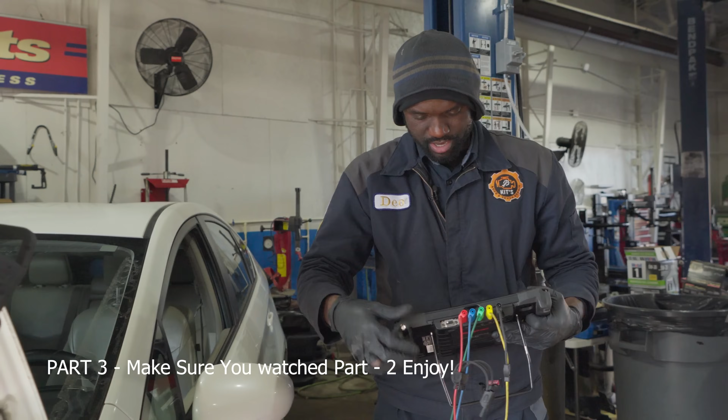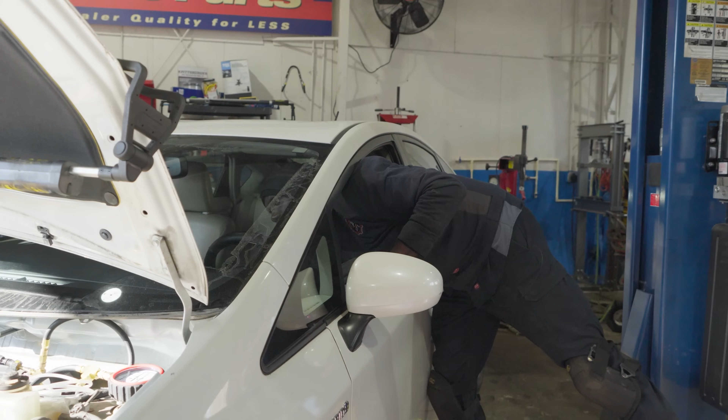So we have replaced the O2 sensor. Now I'm going to, let me turn the key on first. We're gonna start the engine. Okay, so key is on.

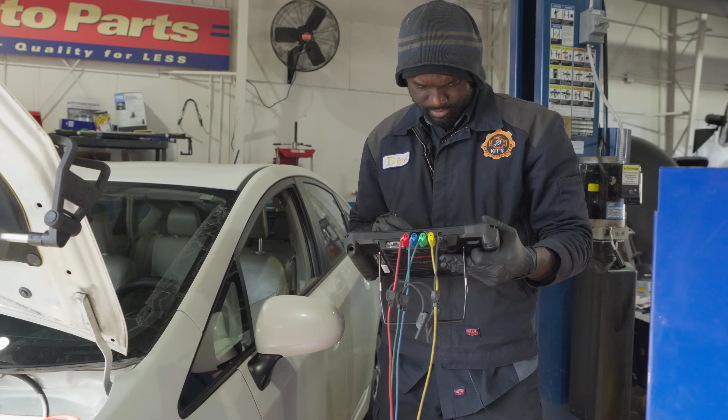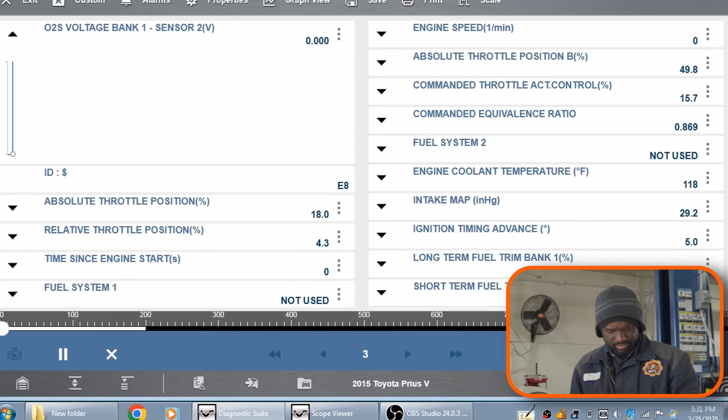Okay, so we have our voltages on the lab scope. One thing I noticed is the voltage on the yellow trace went down to 0.28 volt. I don't know if that makes a difference, but let's see. So I'm gonna graph the second O2 sensor. It's still stuck at 0 right now.

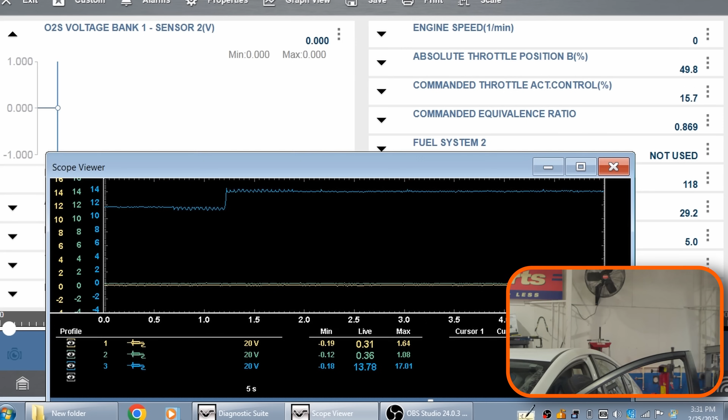Let's bring up our scope. Okay, so now let's start the engine. We might have to take this car for a test drive.

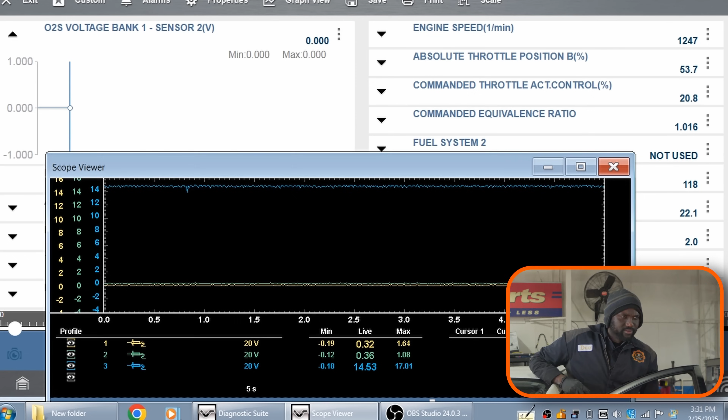We still have 0 on the scan tool. It's odd. Did we make a bad call? Maybe it didn't need a sensor. Okay. I'm not gonna say that yet. Let's go. Okay.

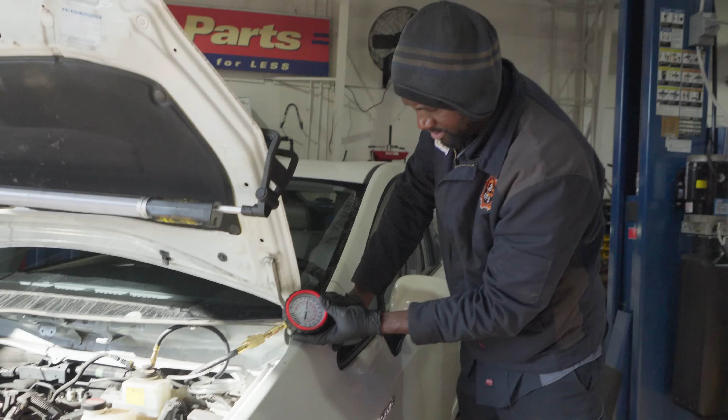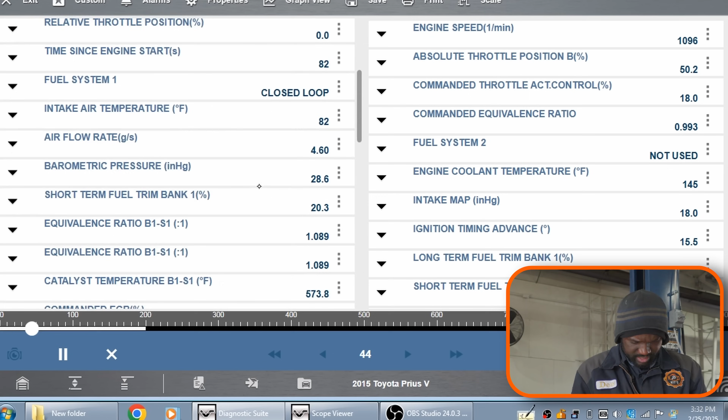So the engine is running and our fuel pressure gauge is at 45 psi. Let's look at our fuel trim numbers. Okay, so long term right now is at... so our fuel trim numbers are still high.

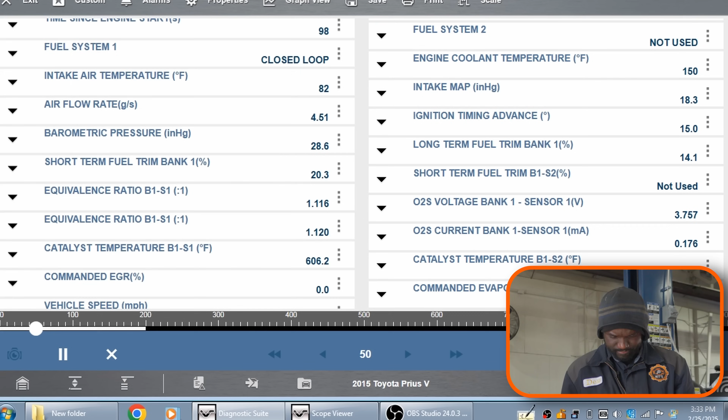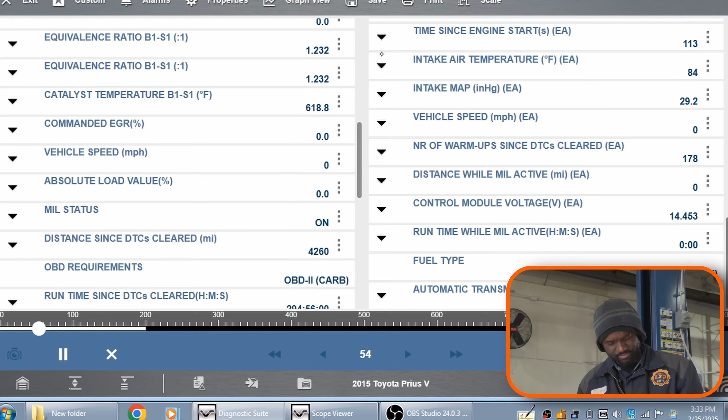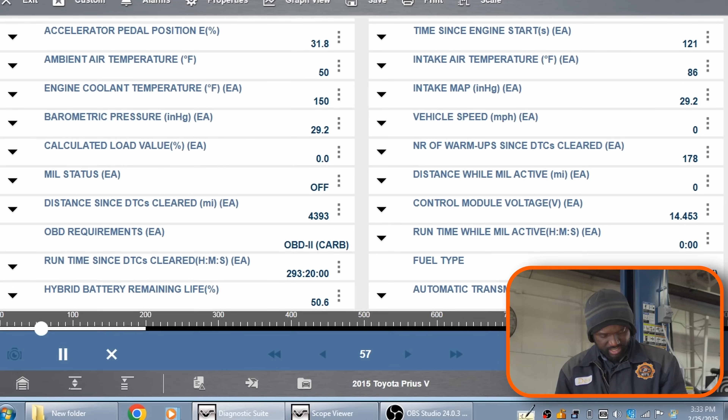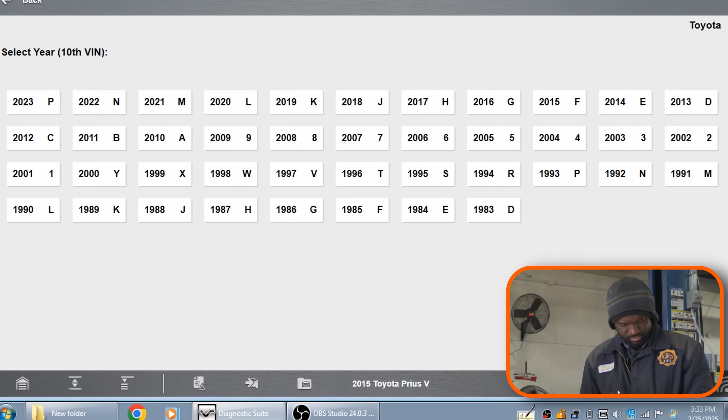Okay. Okay, the O2 sensor is still stuck at 0. Very odd. Now, do we have clogged injectors? Maybe. We might have to take this for a test drive. Actually, let's go back on the OE side of the scan tool. Actually. Interesting.

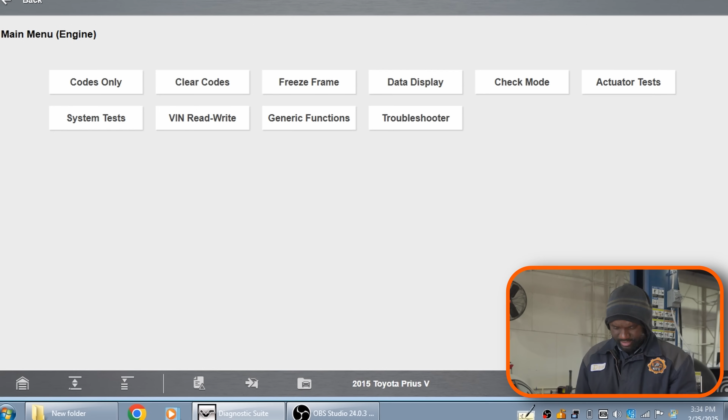Very odd. So there's one more test I want to do. Let's go to functional test. Let's see if we can turn on these injectors. Okay, fuel cutoff 1, 2, 3, 4. I think we can turn on the injectors.

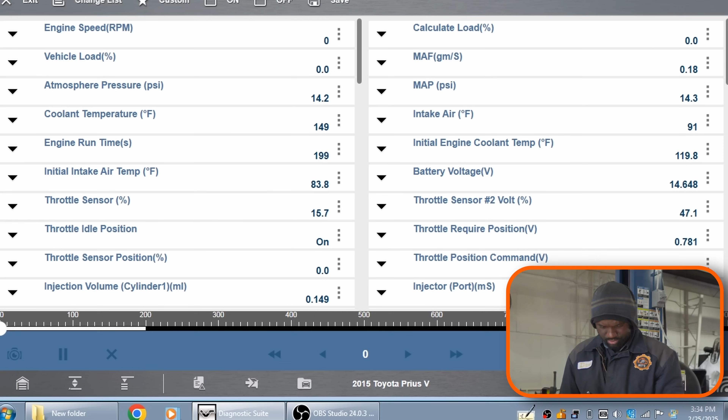Let's see. So I'm going to have my pressure gauge here. Pressure gauge is at 40 psi. I don't know if you guys can see this. We're gonna turn on the injector. Let me back out. Let me start the engine.

Okay, so I'm gonna try to do this fuel cut test. So I believe it's gonna turn off the injector, and then we're gonna look at our gauge here to see if the gauge is going to either drop or rise. And then we're also going to listen to the engine RPM to see if the engine RPM is going to change when we do that.

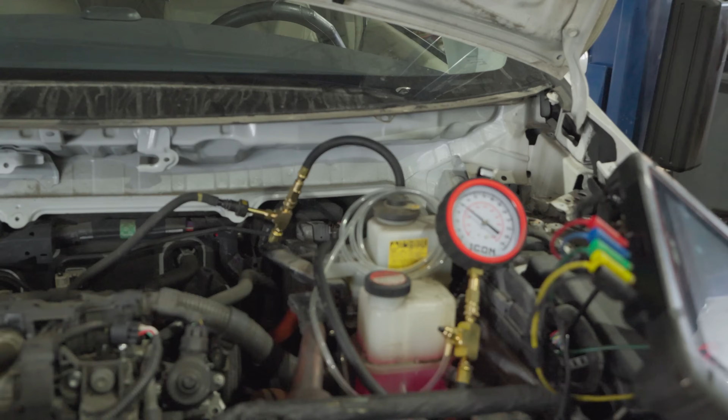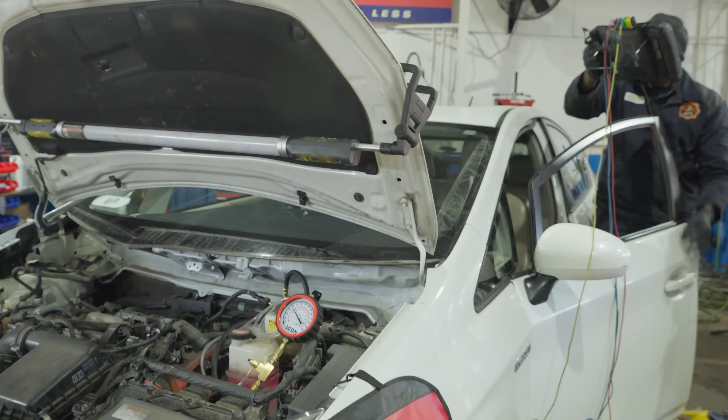Because at this point, guys, I don't see what else can cause this, because I mean, we have good fuel pressure. Our mass airflow sensor is good. Let me start the engine. Let's see if doing the fuel cutoff thing is going to make a difference.

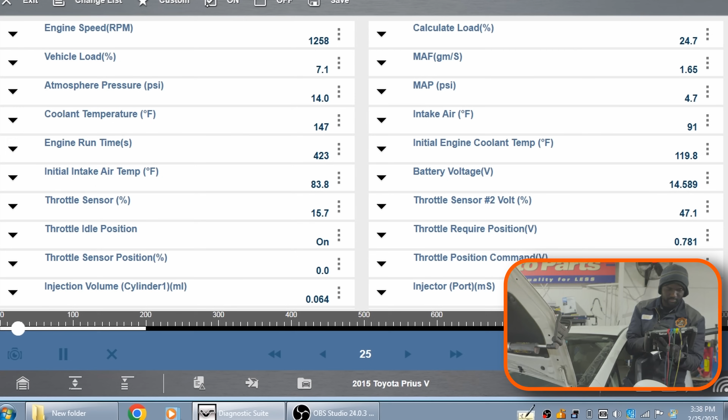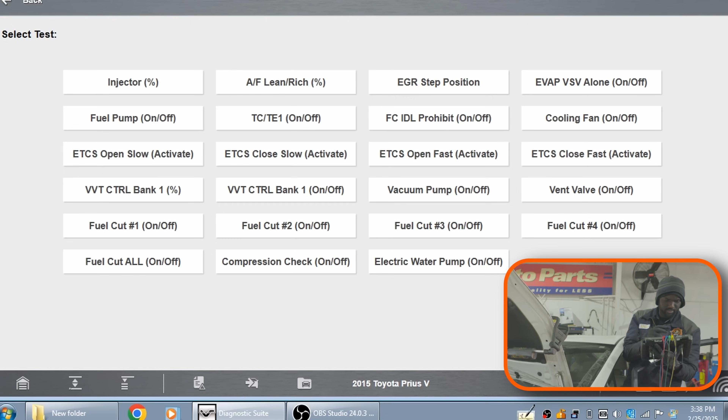Okay. I can keep this thing running. All right, so what test can I do now? Okay, so my Snap-on scan tool is about to die. I'm gonna switch scan tools. I'm going to get my Autel scan tool connected to the vehicle.

The test I want to do now is I would like to use my Autel scan tool to see if it's going to be able to turn on the injectors while the engine is off. Because what I want to do is watch our fuel pressure on the gauge, and then turn on the injectors. As we turn on the injectors, our pressure in the rail should drop.

So if we have a leaking injector or a partially clogged injector, when we turn it on, the pressure in the rail is going to drop differently compared to the others. So the pressure drop won't be pronounced. It's not going to be low enough. That will indicate a partially clogged injector.

Because at this point, right now we changed the sensor. Our sensor is still stuck at 0. So I want to take this on a test drive, but I also want to check the injectors. The other thing that can cause this could be partially clogged injectors.

So I'm going to get these test leads out of the way. I'm going to reroute the sensor wiring properly. I'm not going to show that on camera. I'm going to get my Autel scan tool connected to the vehicle. We might have to take this on a test drive to see what happens. So I'll get that connected and then I'll bring you guys back up. I have the Autel scan tool connected to the vehicle.

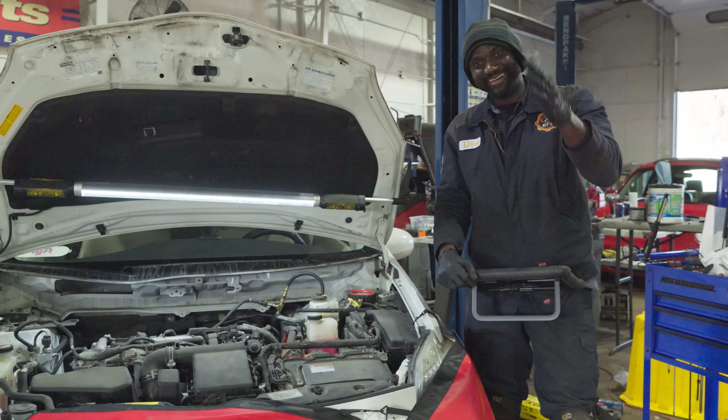So I was actually talking to cameraman Kyler off camera. I was like, so if I was wrong about that sensor, then who's gonna pay for the sensor? Okay, now we're gonna go on a test drive. If I was wrong about the sensor, we're not gonna charge the customer. That's gonna be my bad. It's gonna be my fault. I'll have to eat that. We're not gonna charge the customer for that. We have to get to the point of this.

Right now, I'm starting to lean towards partially clogged injectors, but we're not just gonna throw injectors at this. We have to do as many tests as we can to be 100% sure that's the issue. Okay, so let's scan this first and see what we got. I kind of want to test drive this while I have my pressure gauge connected to the fuel system.

I mean, if our fuel trim numbers were just getting worse at high RPMs, I was gonna lean towards a bad fuel pump. But right now, our fuel pressure on the gauge is good, even while we're sitting here at idle, and our fuel trim numbers are bad also at idle. So that O2 sensor kind of threw me for a loop there.

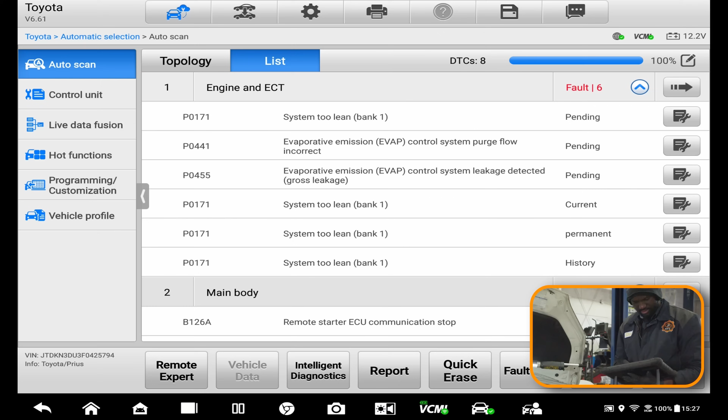Okay, so let's go into the engine computer. Let's go to data. Actually, before we do that, let's go to active tests first.

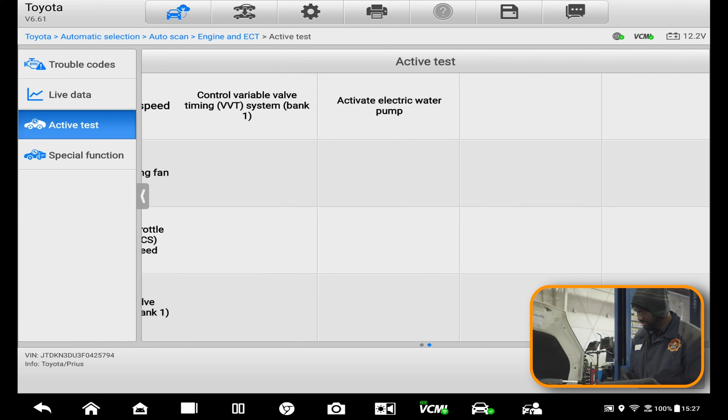So we cannot turn on these injectors. Let's go to special functions. So O2 sensor / oxygen sensor operation. Interesting. What do we have there? Faster detection of the part failure. Inline cylinder. Oh, so this just gives us O2 sensor data PIDs.

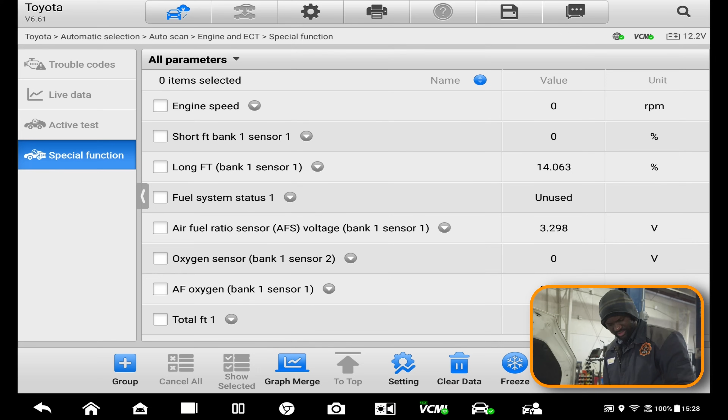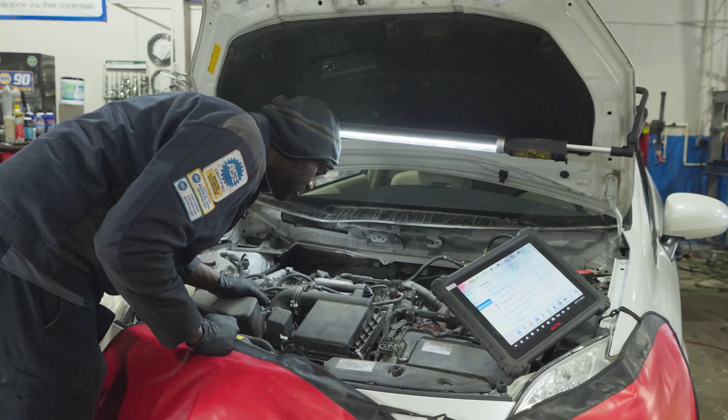Okay, so I have my O2 sensor PIDs. I got fuel trim numbers, O2 sensors. So let's go on a test drive. Okay, I can't turn these injectors on. Okay, let's go. Let's drive this around. We're gonna have our scan tool up.

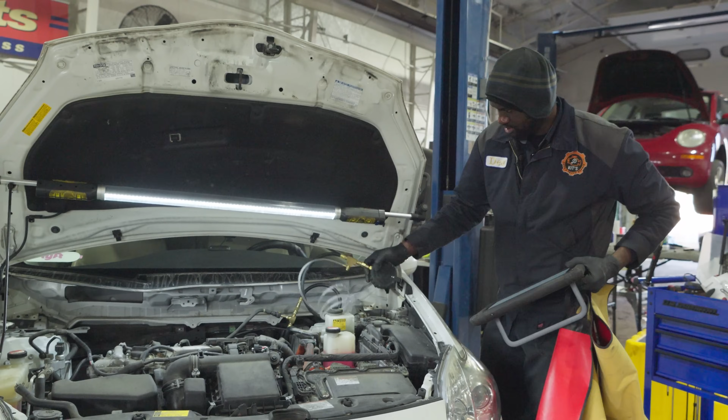I'm gonna try, let me see if I can keep this pressure gauge over here. Let's see, can I have this here? Now, this is a little dangerous, we gotta be careful. We don't want fuel leaking out while we're driving.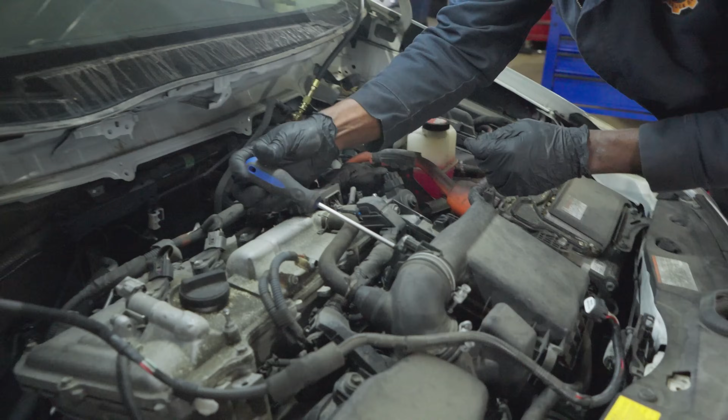There's one more thing I wanna do. Before we go on a test drive, I would like to clean our mass airflow sensor. So I'm gonna get our mass airflow sensor disconnected, and then we're gonna clean it. I mean, I don't think the mass airflow sensor is the issue here, but it's not gonna hurt to clean it.

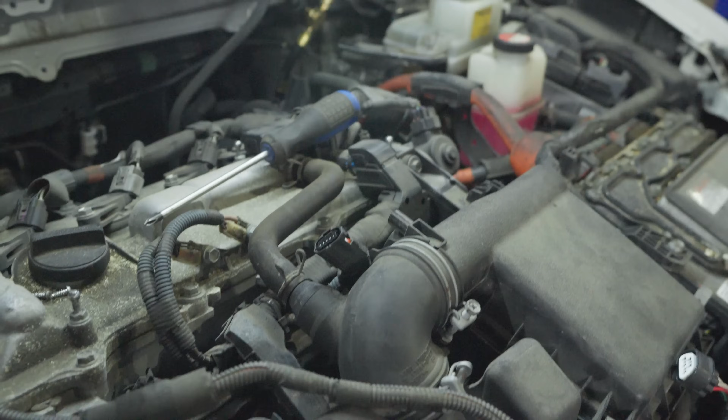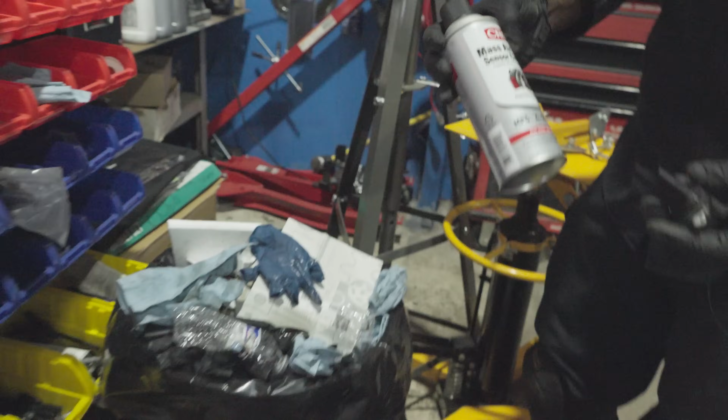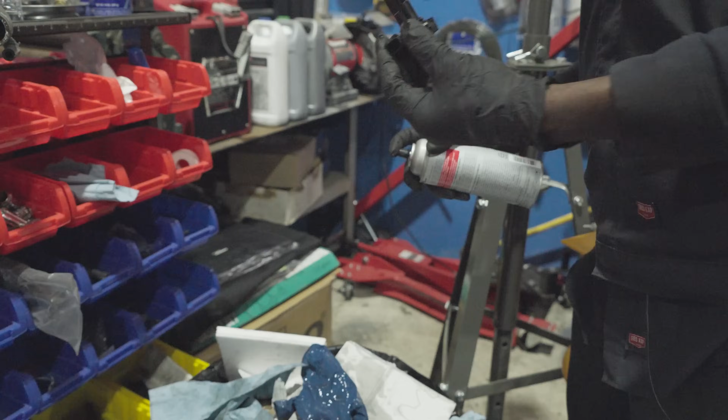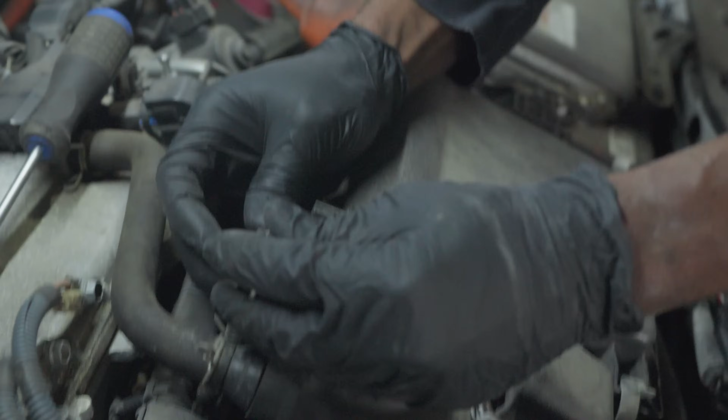Okay. Let me grab a light. So let's see over here. So the resistors on the mass airflow sensor look clean. We're gonna use mass airflow sensor cleaner. So we got the mass airflow sensor cleaned. I'm gonna dry it and then we will install it. All right, so we got the mass airflow sensor dried up. So now I'm gonna reconnect it and then we're gonna reinstall it right there.

Okay, I'm gonna check the air filter while we're here. No, air filter is fine. It's a little dirty, but nothing too bad. Nothing too crazy. Air filter is fine. Okay, this is the wire for the wiper motor. We're just gonna keep this right here while we're test driving. Okay. Cool. So now we cleaned the mass airflow sensor. Let's take this for a spin. All right.

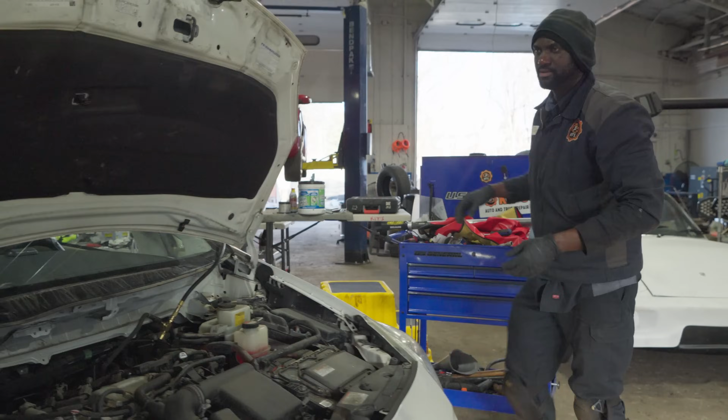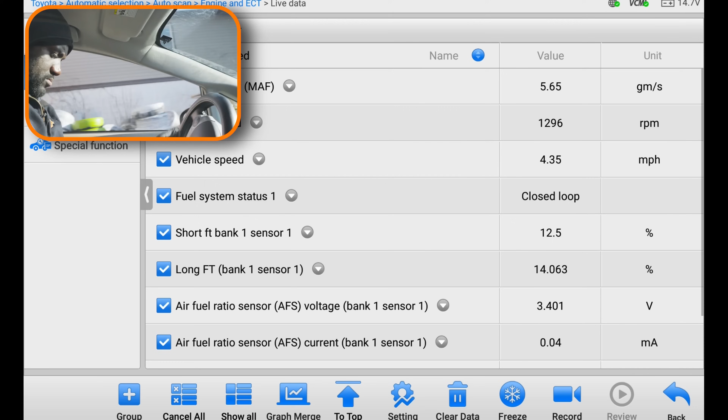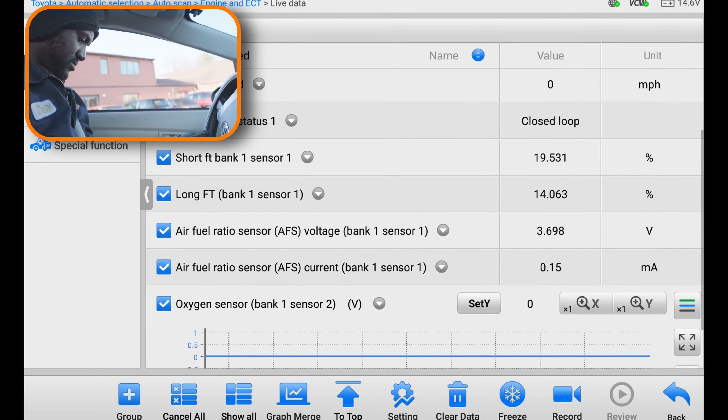So our fuel pressure is still at 45 psi, so we're good there. So our fuel trim numbers are still high. And then O2 sensor, man, this sensor is still stuck at 0. That's odd. Very weird. Okay, we are in closed loop. We still have high positive numbers.

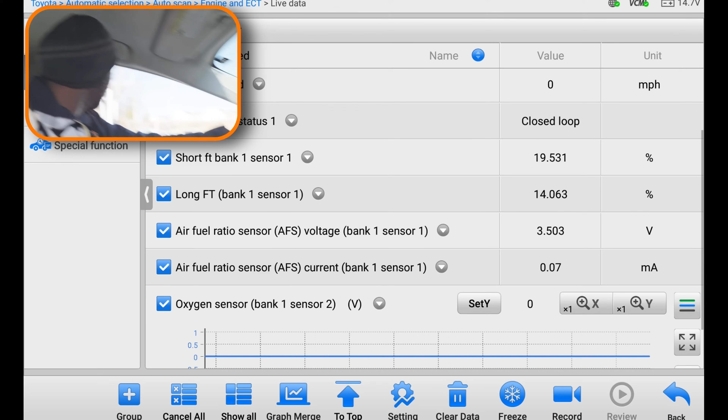That's very odd. I don't know. If there's a Prius expert out there, let us know about this second O2 sensor. What causes the second O2 sensor to be stuck at 0? Very weird.

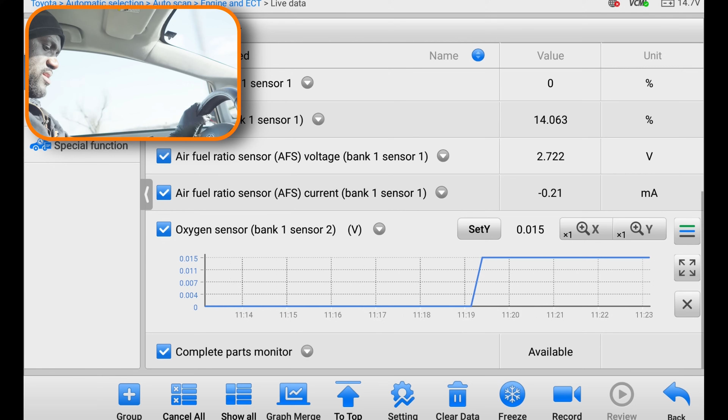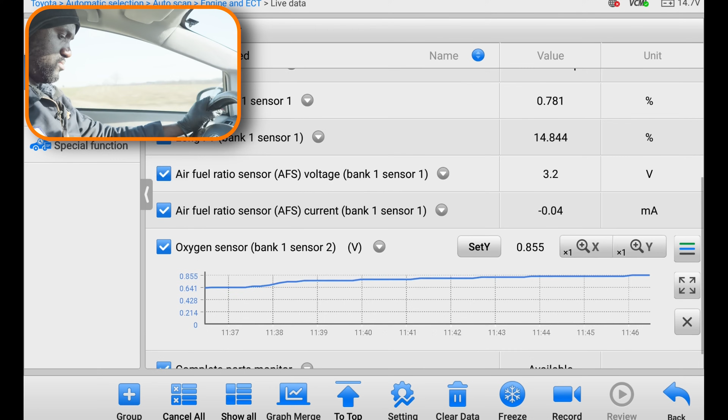So as we are driving right now, our fuel... Oh, the O2 sensor is now working. So you guys will see this on the screen. Okay, I guess the vehicle has to be driven for the O2 sensor to work. So right now as we are driving, our fuel trim numbers are normal. Although we are slightly high. Yeah, we're still slightly high.

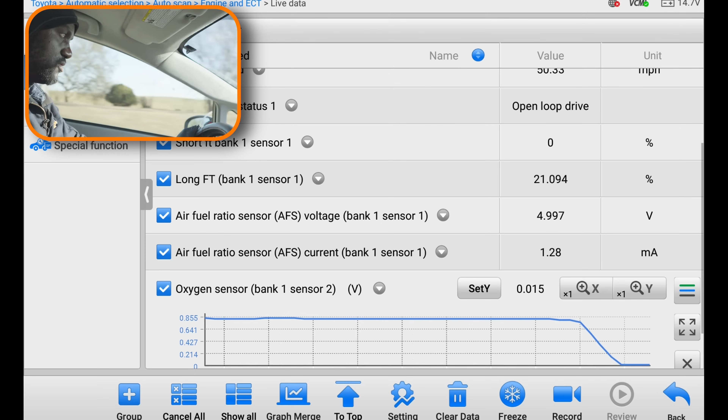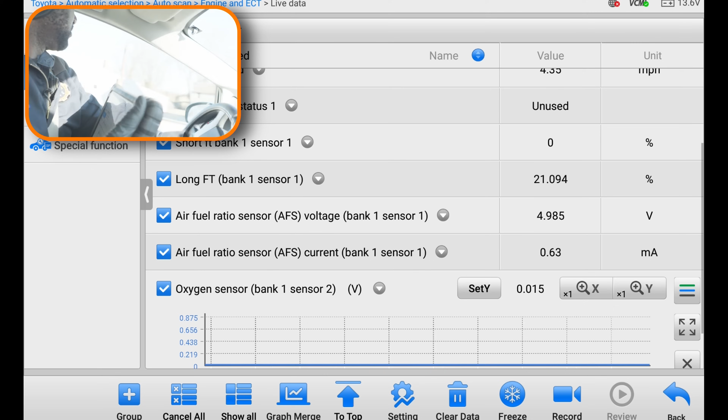Okay, so right now we are pegged rich on the O2 sensor. We are showing 0.8 volt on the O2 sensor, which tells me that our fuel delivery is most likely good. So I'm going to turn around here. We don't have to go far. Let's go back to the shop. Okay, so right now, long term is 21%, short term is 0. Huh.

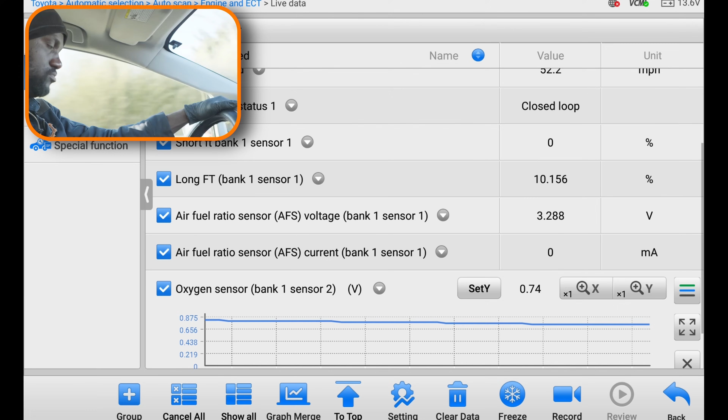So our fuel trim numbers got better. Right now, total trim is about 10%. But remember, the code didn't set while the vehicle was being driven. The code set just right above idle. So yeah, mass airflow sensor is also doing fine. This is weird. Very odd. Okay, let's go back to the shop. I want to watch these numbers again at idle.

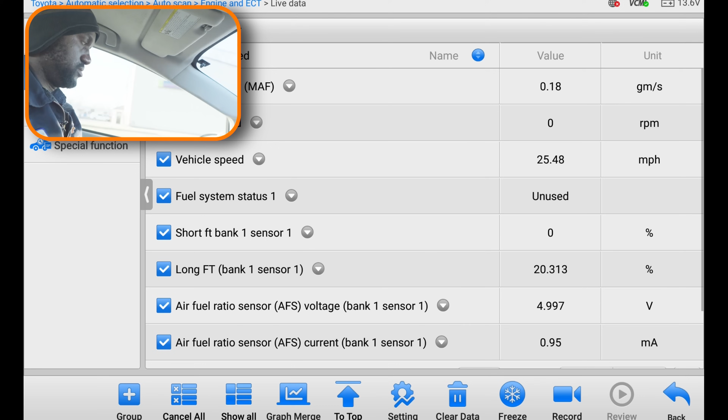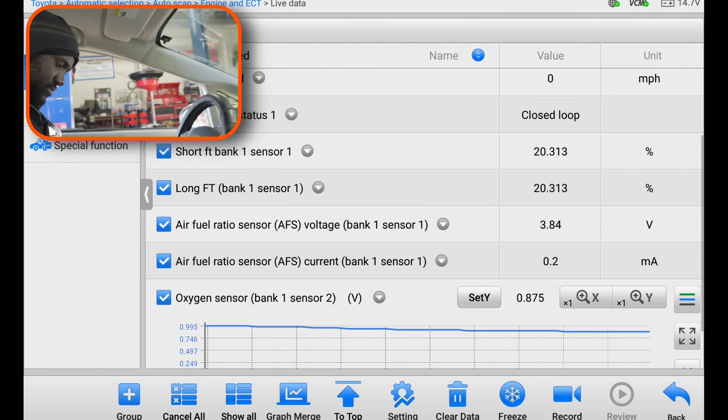Yeah, look, we have 20% on the long term. That's too much. I mean, we are in closed loop. Very odd. Let me start the engine. Let's get the engine running. Okay, our O2 sensor is now working. The O2 sensor is working, but our fuel trim numbers are still high. We still have high positive fuel trim numbers.

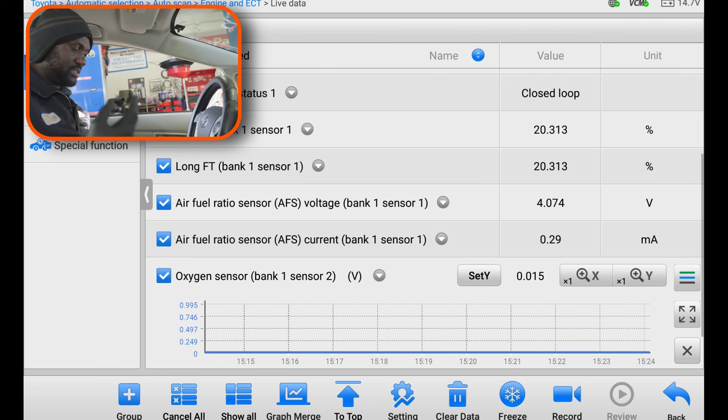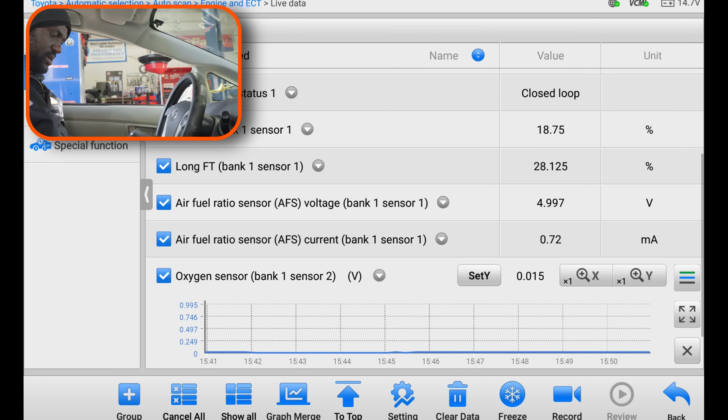Now, at this point, I only have two things left. It's either we have fuel injectors that are not spraying enough fuel in the cylinders at idle, or we may have a stuck open purge valve, because a defective purge valve can cause this too. Yeah, as soon as we go in closed loop, our fuel trim numbers start going up. Okay, let me turn off the engine. Let's go under the hood.

Okay, let's go under the hood and check the purge valve. Now I'm going to plug the line that goes to the evap purge valve. So Kyler, if you can show this line over here. So this line is connected to this hose. So this is the evap line that comes from the back of the vehicle. So it goes down under the air filter box. It's connected to the purge valve. You guys won't see it, but it's down there.

Okay, so just look at this line. This is our line that goes to the purge valve. So now I'm gonna disconnect it. I'm gonna block it with this old spark plug that I have over here. Okay, so if we have a stuck open purge valve that's causing a lean condition, the fact that I blocked this, our fuel trim numbers should get better.

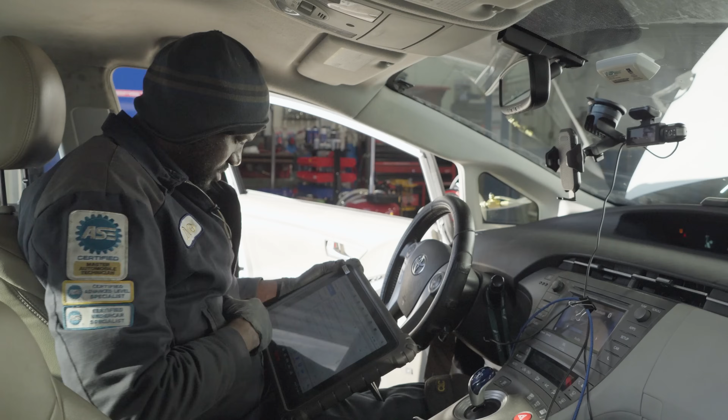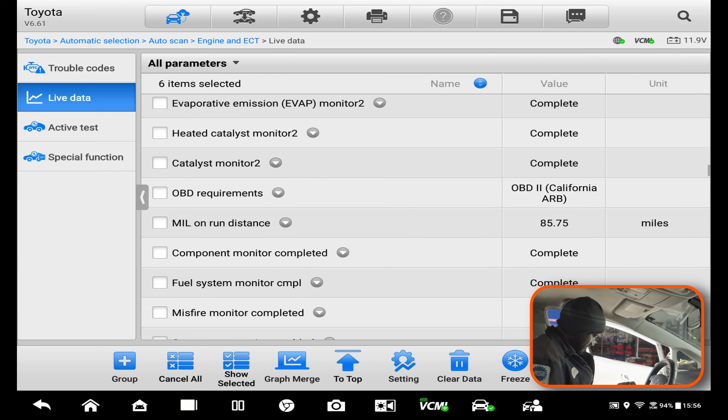So right now we are plugging the line that goes to the purge valve. So since I plugged this, let's go back in the vehicle and start the engine and see if our fuel trim numbers will get better. And if they do, I'll be so mad, because of all the time I've wasted. It happens. Because if that doesn't help, then it's gonna be the injectors, because I don't see what else can cause that.

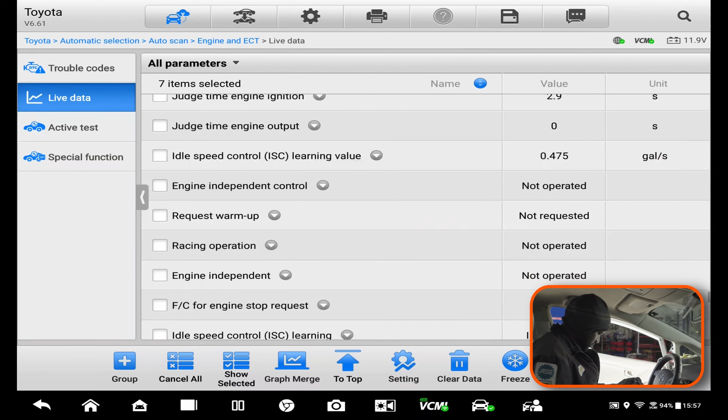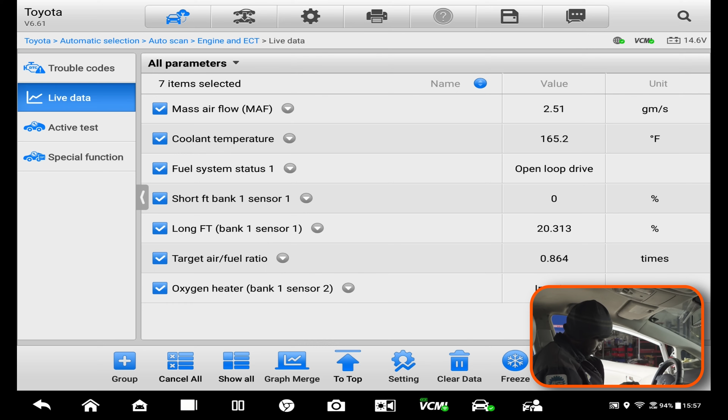Interesting. Let's see. We got our fuel trim numbers. Okay. Now I'm gonna start the engine. Okay, so we have high. Okay. Oh, our numbers are going down. It's fixed. It was the purge valve. The purge valve is stuck open. I mean, you guys will see this. Yeah. Stuck open purge valve.

Because right now our total trim is 4%. Dang, why didn't I think of that? It's the freaking purge valve. The O2 sensor threw me off because I saw the O2 sensor was stuck at 0. I mean, hey, we live and learn. This is a lesson for me. I guess on Priuses, the second O2 sensor being stuck at 0 for a little while the engine is running is fine. And for some reason, Kyler, if you can notice, the engine is idling even longer now. I don't know if that has anything to do with what we did.

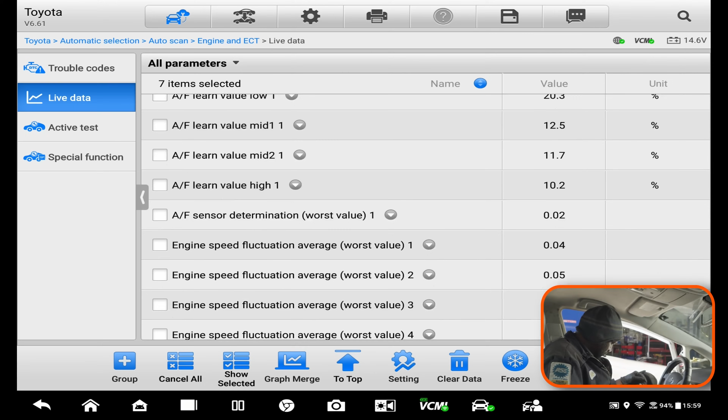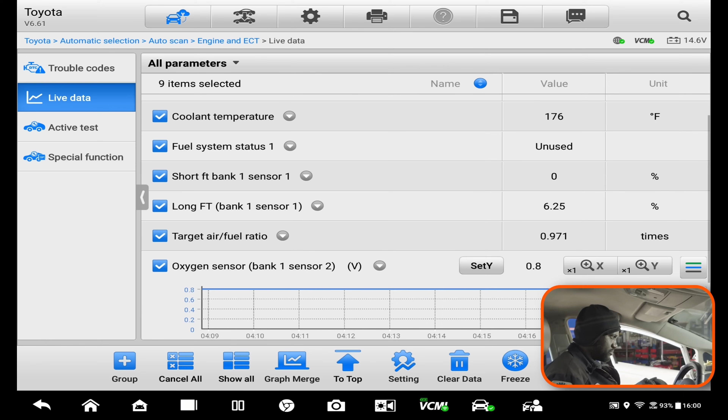Let me find my O2 sensor PID, especially the sensor after the catalytic converter. Okay, the engine just died. So our fuel trim numbers got better. I'm gonna graph the second O2 sensor voltage PID right here. So let's get the engine to start. I mean, the O2 sensor is working now. I don't know, maybe the old one was bad to the point where it was taking too long to read. Right now we have 0.78 volt on the second O2 sensor. The other one was just stuck at 0. Our fuel trim numbers got better.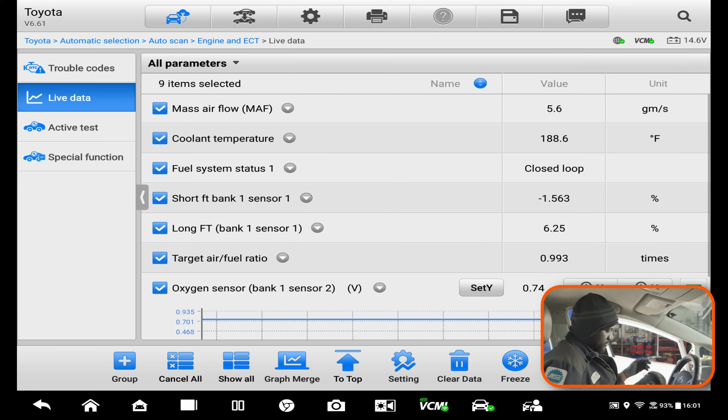Yeah, look at that. Now, we replaced the O2 sensor. We cleaned the mass airflow sensor. Our trim numbers didn't get better. But after I plugged the evap purge valve tube, our fuel trim numbers got down. So this really tells me that we have a stuck open purge valve. And now that I'm thinking back, the telltale sign of this, I feel so bad, I just wasted a lot of time. Because remember, we had the evap code and we also had the lean code. That was a telltale sign of a stuck open purge valve. Ah, man, I feel bad.

You know what? We're gonna upload the whole thing. You guys will learn from my mistake. I hope you don't make this mistake. I know this. I don't know why I wasted time. Because after I saw the evap code, the first thing I should have checked was the evap purge valve. Man, we're done. I feel like an idiot right now. I should have figured this out 5 minutes after we first scanned this morning. Okay, at least we know. Yeah, because we had the evap code. Let's go back to codes. Man, I feel we just wasted a lot of time.